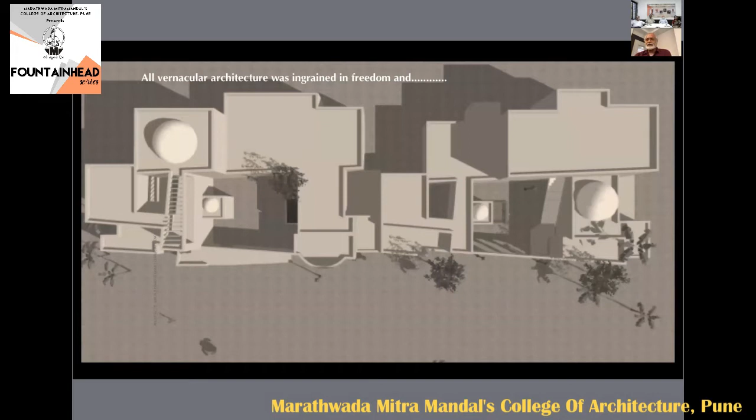Now, all vernacular architecture was ingrained in freedom. If you see the slides, you will find these are all works of our office, and I'm trying to explain what I'm saying through the images behind. All vernacular architecture was ingrained in freedom, and this freedom came with a sense of responsibility, and that sense of responsibility is missing these days.

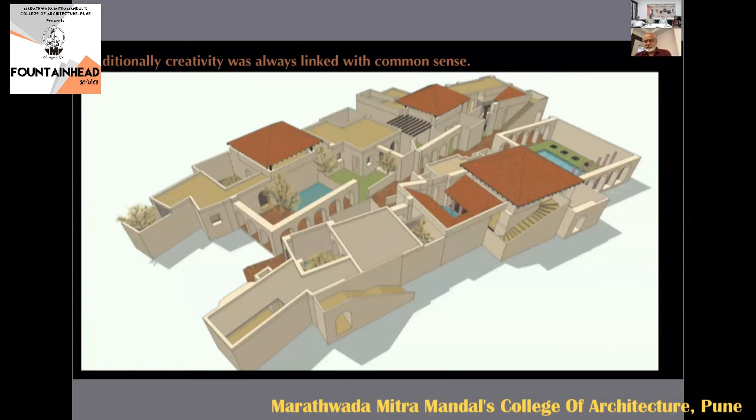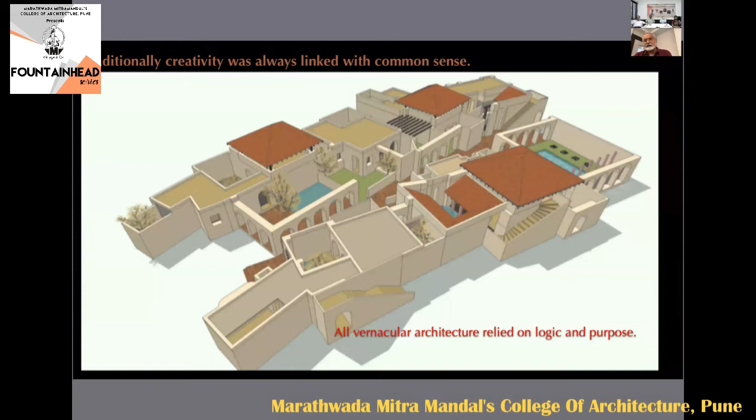Traditionally, creativity was always linked with common sense, and this vernacular architecture relied on logic and purpose. Today, we have lost the sense of logic in architecture.

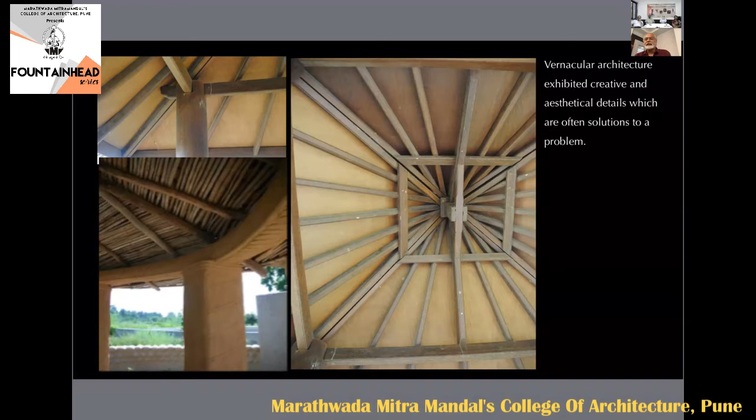Indian vernacular architecture respected growth in conjunction with continuity. Now, this conjunction with continuity is what we have lost. And it exhibited creative and aesthetical details, which are often solutions to a problem. These days, we are creating problems and then giving solutions. It's the other way around.

Architects need to pick up the threads that modernity severed. The need to reinvent a new and more responsive architecture, which will be a continuum of the vernacular. The need to reinvent - this is a very vitally important link in the whole process.

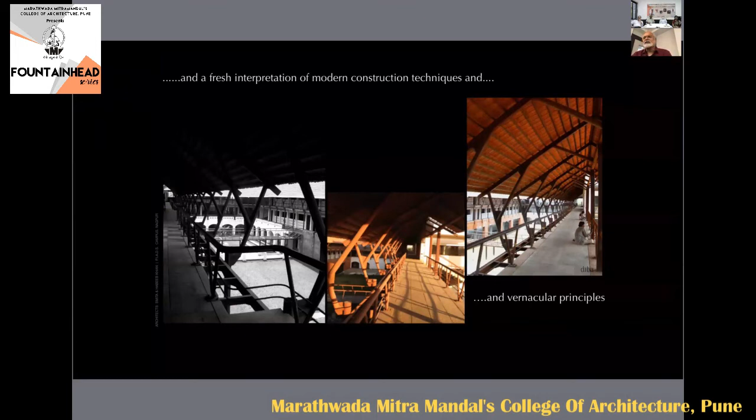The need to reinvent a new and more responsive architecture, which will be a continuum of the vernacular and be a response to climate, context, tradition, culture, and our lost construction techniques, importance of daylight, ramifications of heat, and appropriateness of built forms, resulting in a new architectural vocabulary, a language having its root in layers of traditional wisdom, and a fresh interpretation of modern construction techniques and vernacular principles and forms, and is a link between the past and the present.

I do not want any historian to assume that my buildings were built in the 1100s or 1500s. I want historians to believe that my building was built in 2000, 2020, 2021, because the concept of time frame in architecture is very vital.

It determines the evolution and the chain of evolution that I was talking about. And this we call contemporary vernacular.

Now, what is contemporary vernacular? The images you were seeing were from Priyadarshini Institute of Architecture and Design Studies that we designed, which relies heavily on the wisdom of our traditional architecture, uses modern materials, and uses a construction technique which is very age-old.

There are no RCC slabs here, and so on. It uses the wisdom - for example, if you see the wooden post when it went into an adobe wall or a mud wall, over a period of time it got decayed.

The same thing happens with the steel column - when it goes into brickwork, it starts rusting soon. So our vernacular builders used to leave a gap between the wall and the post where it went in, so that it lasted long.

The same principle has been used here. So this is what you learn - you do not need to reinvent the wheel again and again.

So what is contemporary vernacular? It's like going back to roots, building sensibly, building optimally, building intelligently, building correctly, within the framework of context, climate, tradition, geology, geography, and economy. So this is the actual thought process.

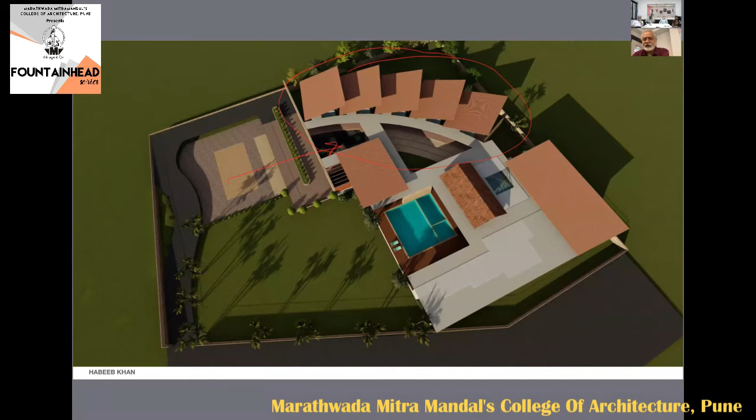You will see the idea behind it. Why does a person make a farmhouse? The farmhouse or a weekend home is something away from the city to de-stress himself. His expectation is that he should get a space to live in, wherein everything he gets is different than what he gets in a city. So that's the idea. Let me go to the next slide and we will see.

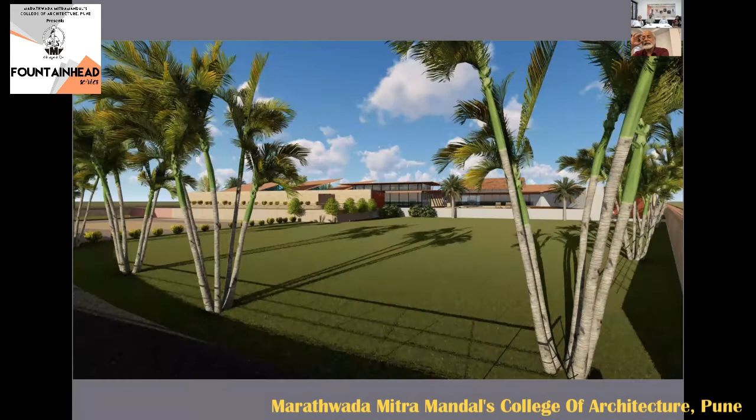That's the entrance to the house, and that's how you enter. You arrive, get dropped off, and that's the opening where you walk in. There are lily ponds and water bodies.

The concept is there are two planes: one is a horizontal plane, and the other is the roof plane. We are improvising here, where the Mangalore clay tiles, the terracotta tiles used on the roof, are having solar panels, so you don't need separate solar panels anymore. But the experiment is not yet successful. We're still in the experimental stage, where we'll be able to efficiently produce solar power and convert it into providing electricity and other power to the house.

The local sandstone, called Savner sandstone, has been used, and the wall masonries are actually load-bearing masonries. There is no RCC column or concrete structure here. The stone masonry takes the steel slab, which is a composite slab. I will explain how it is.

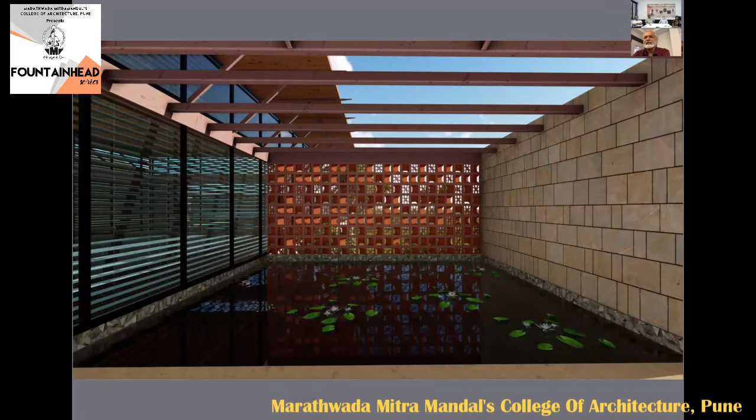Various spaces in the farmhouse. That's the bedroom from the outside, with large decks, overhangs, and taking in north light and so on. It's a composite structure of stone masonry, somewhere exposed brickwork, and steel.

There's the pool, and how you look into the drawing room, the formal drawing room which is for public and guests, while the other part is a private area. That's how you look into various insides, the spaces inside. That's the formal room I was talking about from the entrance.

Look at the structural system we're having. It's a steel structural system where the system is integrated with the facade, which is the glass facade. It's an integrated system wherein the structural system takes in the facade and the cantilever. If you're seeing, it's a 3.5 meter wide cantilever being supported by those triangular metal sheet brackets.

Same here as well, the diagonal structural system comes down from the foundation and goes up to the roof. And if you notice the structural system here, it's integrated with the columns coming in from the foundation. So a little improvisation here and there, and that's the inside courtyard.

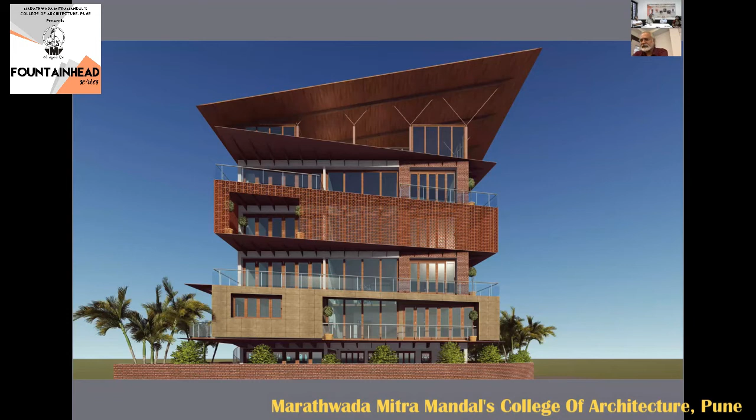This is basically to show you an example where there is a tight plot of land in an urban city where still you can break down and articulate the facades with a solar powered roof on top.

The openings in the stone cladded floor are basically because of the activity happening inside, and the brick jali, terracotta jali on top, is something to create privacy because of the residential floors on top.

These are some articulated views of the facade. And this is how it looks.

There's another house in a village about 50-60 kilometers away from Nagpur, where there are a lot of Maharashtrian vadas. What we have done is tried to create a contemporary expression of that vada with the same planning.

This is another house where we improvised upon this; it belongs to a Muslim family who wanted privacy for their living quarters. The ground floor has the public areas.

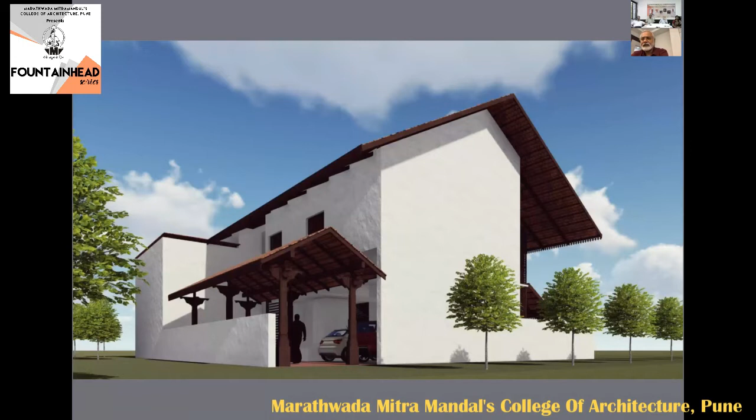This is another house in another community development that we're doing. This is made entirely of adobe construction, unburnt bricks and adobe plaster, and wood, recycled wood, that is.

I'll just skip this. And this is an interesting house; you will find it doesn't fit into our style or vocabulary. But we're doing a development where there is a very strong colonial presence.

I'm sure you would know Lutyens' houses, residential houses in New Delhi, Lutyens' Delhi, whatever you call it. A similar settlement is in this town where we're developing this.

So we've tried to use that, and incidentally, the columns that you see have been recovered from a house which was demolished. So that vocabulary has been used there.

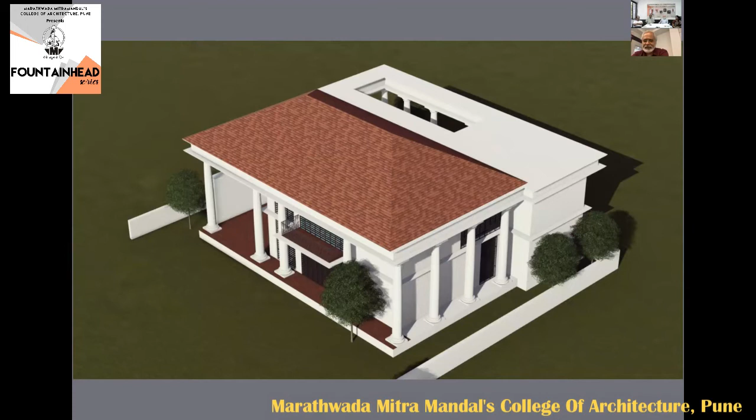Basically, being contextual does not mean that you will build in mud or use tiles or use stone or something. Context, you have to identify what the context is, and that context is to be used in your projects.

Now, there's a house that we did in Indore. It's completed now, but I think I don't have the finished photographs.

The presence of the water body was overwhelming inside, and we didn't want any built mass there. So the grouping of the whole thing has been done in such a manner that it is absolutely transparent wherever the lake is visible. This side is the lake side, and all this is transparent, visually transparent, eyesights all over. The area which does not look into the lake is all service areas and other areas where transparency was not possible. And the swimming pool sits like an infinity pool at the corner where the lake comes closest to the building.

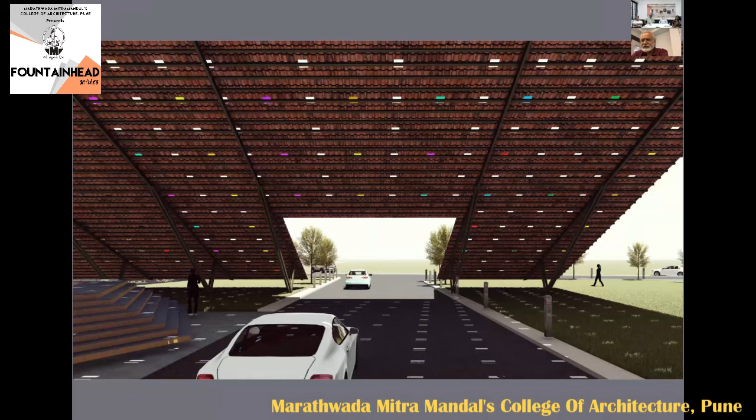That's the entrance to the porch. Once you're inside, the entire porch is lit with multicolored glass, multicolored terracotta tiles having glass inside. This will also have...

Solar-powered Mangalore tiles. At night, when you drive down from the entrance, the landscape, designed by a Hyderabad architect, is dynamic - as your car or bike drives in, it triggers a displayed landscape as well as dynamic lighting systems. The movement of the car actually governs the lighting that happens in the porch as well as in the landscape. That's how you exit the porch and look at the pattern the sun creates on the walls throughout the day, and the LED lights we create at night.

There's the entrance walkway. You walk into an open lobby with nothing built except a huge roof. Then you sit there, chat, and there's a reception counter. Incidentally, the columns used are also recycled and resourced from a building quarry close by. That's how the passage is, and you can see the lake behind.

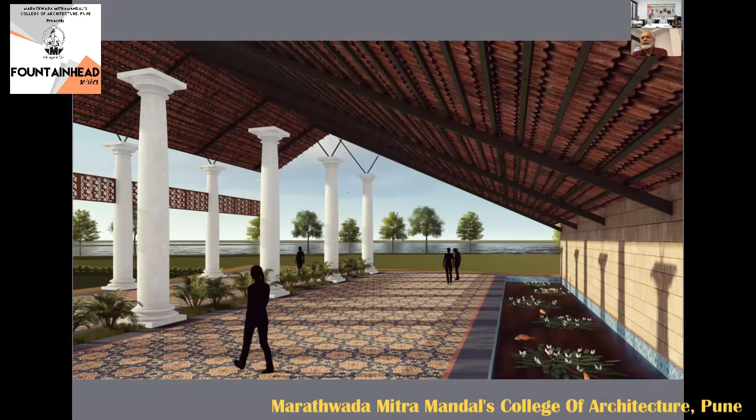You walk into the restaurants on the left hand side. On the right hand side is a huge, about 2 acres of sitting area for open dining and a coffee shop. That's the open area, sit out. The swimming pool, the services of the pool, the changing rooms around the pool, the restaurant facing the lake and the pool.

I just try to understand the vocabulary and the structural system, and the architectural connotation that it has on the built form.

Now, this is an office we're doing in Delhi for a student organization. Exposed brickwork, northern side is the facade with the sun roof with solar panels, and how it looks at night. This was thought to be a very progressive and non-Indian looking building, so we were asked to revise the designs. This is a place where students from across the country come and learn and study and live. So we tried to borrow motifs from across the states, 35 plus states, and convert them into various panels of GRC, wherein the building assumes this shape.

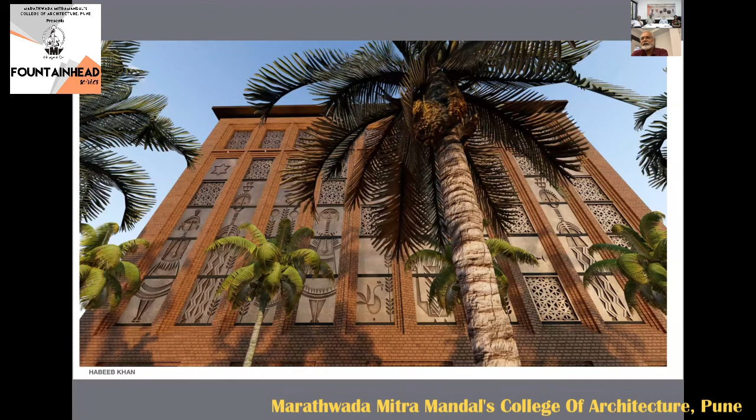The work has started. And there's another political party's headquarters in Rajkot.

The building is made an effort to be transparent, to interact with the street outside, with people outside, and vice versa. People walking on the street should also visually interact with what is happening inside the building. You have a dramatic entrance to the first floor of the building, and on the other side, you have screens to shield when the sun comes in.

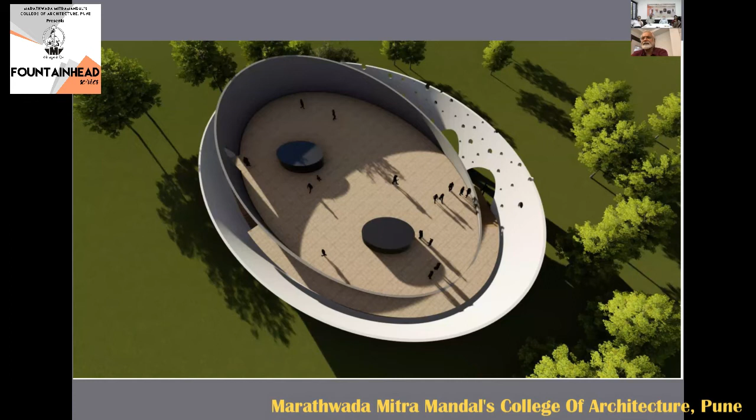There's a small museum for two saints that we're doing in Nanded. This is just the circulation of that museum, which is important, wherein you climb through a ramp or a staircase and go up, pay your obeisance to the saints, and come down to the hall on the ground floor through those ramps, seeing and understanding the life and teachings of the saints.

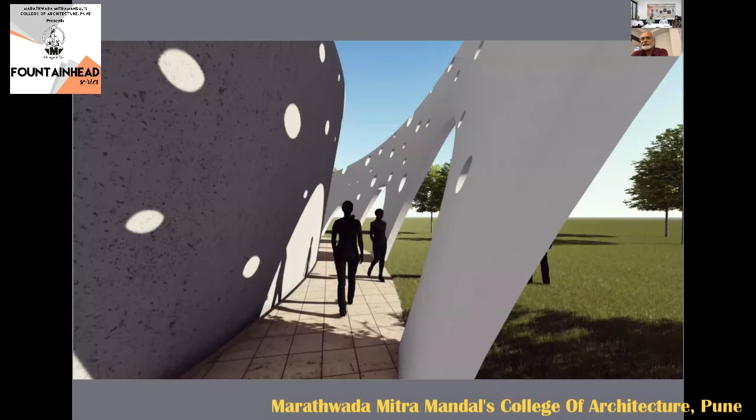This is a museum that we're doing for Father of the Nation in Sevagram, outside the famous Sevagram ashram. It's in proposal stage at the moment, it's gone for approval.

The humbleness of the person and the personality and the thought process compelled us to take the museum below the ground. We already had a slope of more than 3 meters on the site, and we utilized that slope by digging and filling, making the building absolutely underground.

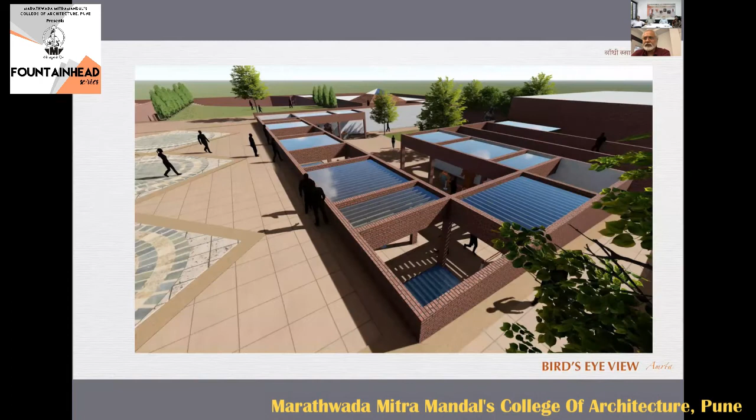So this is what you see when you arrive into the museum. You take a ramp down, and it's made up of brick and exposed brickwork totally. Somewhere to give relief, there's a plastered wall. Various courtyards, interactive spaces, patterns, and even when you're on top, if there's a roof or a covered area, that is also transparent. You can see what is happening inside by standing on the arrival level. So it's not that there's a slab or a solid surface and you cannot look down.

So this is how various courtyards and everything, interactive spaces, are arranged.

This is absolutely on the drawing board, as we have given a proposal and we are awaiting approval from the government. Then it will go on to the detailing stage.

Now, this is a Freedom Fighter Smarak and museum in Chhattisgarh. This also derives from the fact that the freedom fighters from Chhattisgarh, basically tribals, were unrecognized and not acknowledged, and very humble and docile people. But their contribution in the freedom struggle was immense.

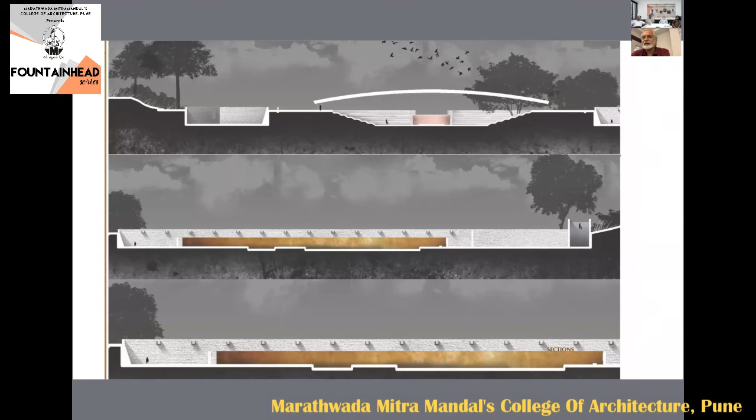These are various sections which I won't have time to discuss, I'll just show you. This is how it looks. You just have a white dome when you see from top, and everything else is grass and landscape areas.

And then you go down into the memorial and the museum.

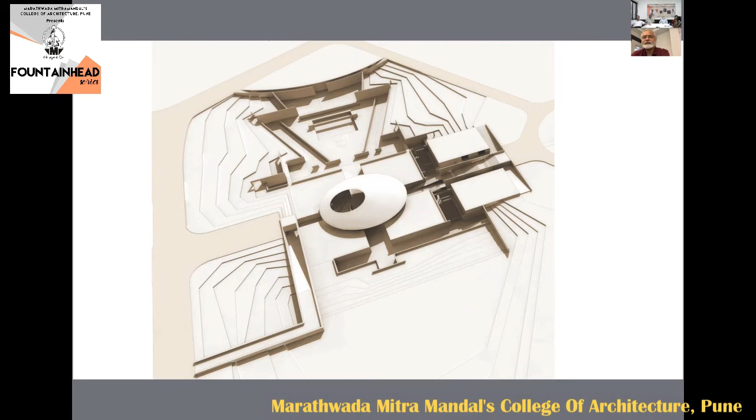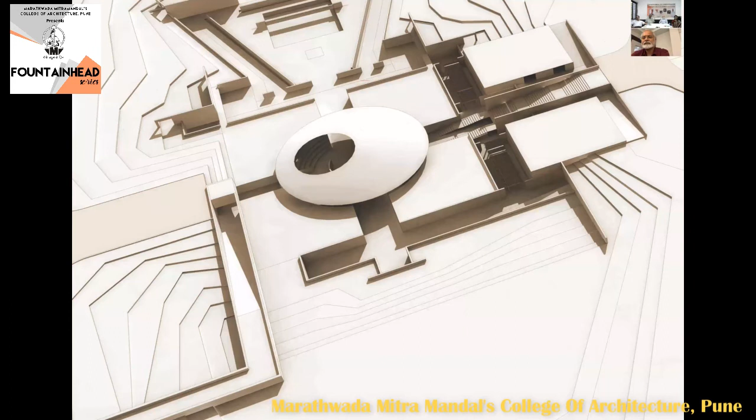The file is heavy, I think. This one... it's getting stuck. I'm sorry, there's a break here.

So this is how the museum is. On the left-hand side is the memorial. On the right-hand side, with that circular dome with an opening in between, is a courtyard which is covered temporarily with a temporary fabric-like structure, and the museum is inside, in the ground.

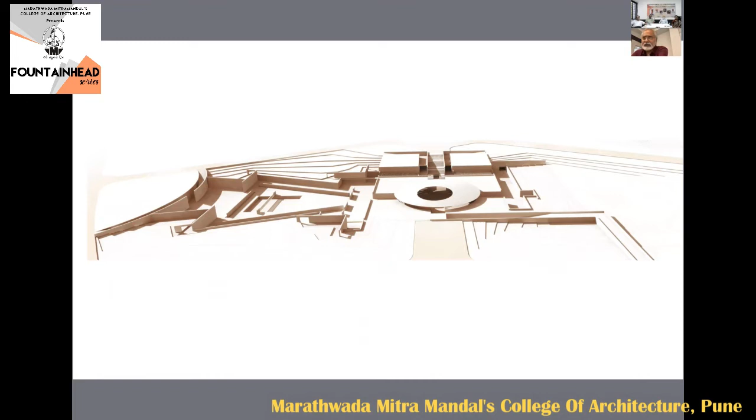There's a natural slope of the site coming from the back to the front, and that's what we utilized for the memorial and the museum. This is how it looks.

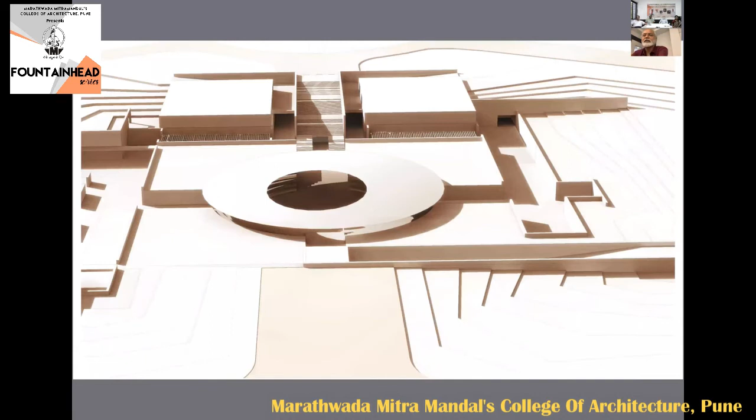That's the central courtyard of the 4 blocks of the museum, where you walk down into the central courtyard, and on the 2 perpendicular axes are your exit, and on the left-hand side is the memorial, where you have walls inscribed with the names. That's the entrance to the museum, where you walk into the ground and come to the museum.

Now, this is a pottery research center. You can ask me to stop whenever your time is up, I can stop anytime and explain.

So this is a pottery research and development center in Maharashtra, where there are existing facilities. They used to make pottery, and they still make some pottery and do research in terracotta material, building product, and material development.

There were 2 chimneys existing on site, which you can see, and we have retained that visual, potent symbol of those chimneys from days gone by, and tried to club the buildings around the chimneys.

So the open areas are needed to dry the terracotta and ceramic products. That is what it is, and the kilns have now been modernized and taken in.

On the left-hand side is the white roof that you see in the administrative block, laboratories, research center, and storage units. On the right-hand side, you will see hostels, staff quarters, and conference facilities.

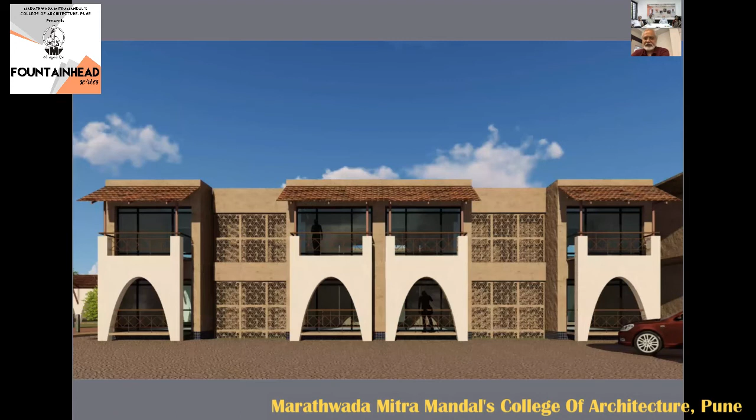These are the hostel blocks, ground plus one, the staff quarters, and the play area around the staff quarters, which is in phase 2. This is how it looks, and that's the conference facilities and so on.

Now we're doing some wayside amenities for the NHAI, and there are a couple of proposals. This one is being made outside Nagpur. It's an interesting form where there's a shortage of land on both sides, the left-hand side and right-hand side of the highway, so we give only parking and toilet amenities there. The entire food court and other activities are lifted above the ground, 6 meters up, connected by lifts and staircases.

This entire block is a solar power generating block, with advanced solar panels that produce enough electricity not only to power itself but also to supply power to nearby villages. So this is how it is.

I'll just skip through—it's a structural tube and also solar generating. We're also experimenting with road panels; when cars drive over them, they also produce electricity. It's not a great success at the moment, but we are still trying to find agencies and vendors to do that.

Now, as the highway travels across states, the vocabulary keeps changing. So when it travels in or around Jaipur, we try to make it contextual, using Dholpur sandstone, Jaisalmer stone, and other locally available Khatu stones, borrowing vocabulary from local, potent architectural symbols.

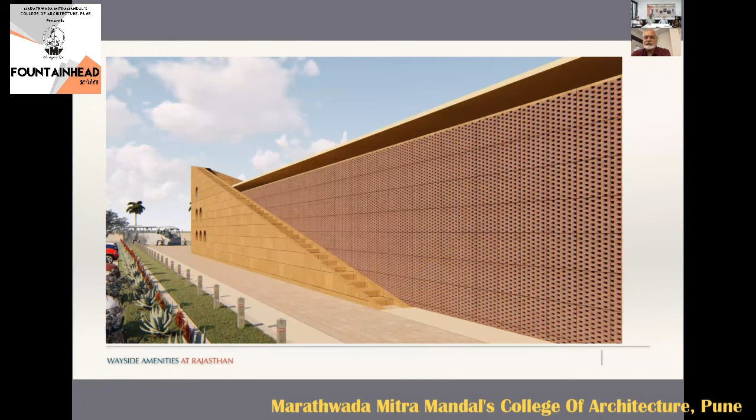The detail—one of the details—the jali, the stone jali, and so on. This is how it looks, the LHS and RHS, about 15 acres on the left-hand side and 15 acres on the right-hand side. Some activities are connected by an underpass, and some activities don't repeat.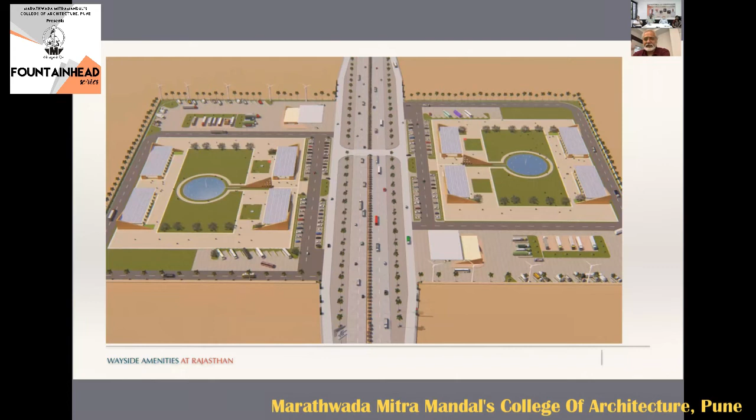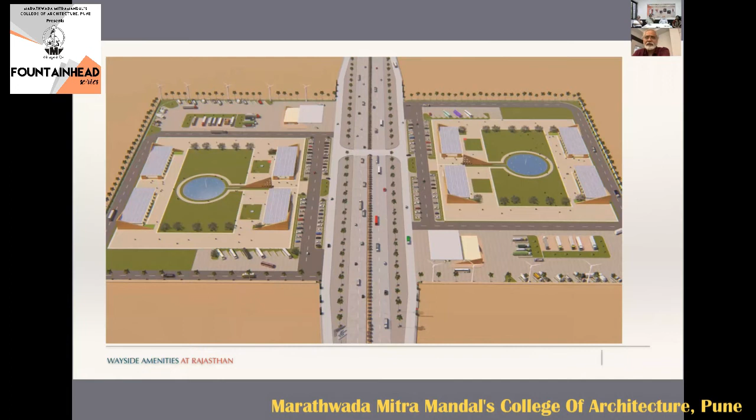Activities like a trauma center with a few ICU beds and other medical facilities, a huge food court, a motel, a shopping area for local produce, a dhaba, a dormitory for truck drivers, a fuel station, and so on. So some activities repeat, some don't. This is how it is.

When you reach Jodhpur and cross it, exiting towards Gujarat, the vocabulary changes but the material remains the same—the construction technique stays the same in stone, and all this is being built. So this is how it is.

The details of the food court from the outside, with the same concept of recycled water, but in the form of a square cone and so on. And this is it—we're doing this across the country.

It changes when it starts from Srinagar—the vocabulary changes—and when it comes to Gujarat and further south, again the vocabulary changes. Now these are the Parli Vaijnath Temple in Beed. We're doing some work there, but the project is on hold at the moment.

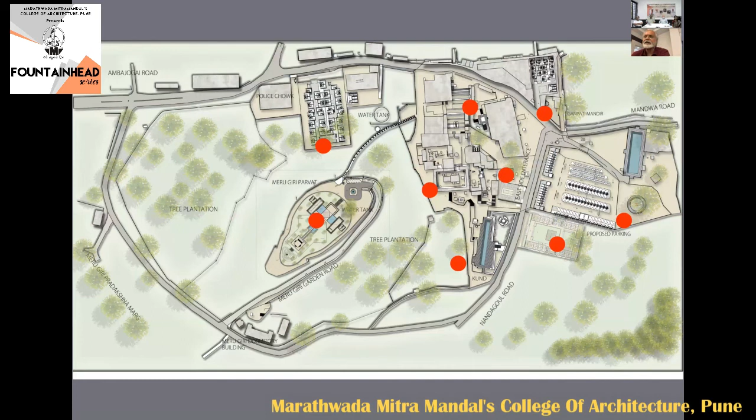So I'll just go through these possible interventions quickly. This is the entire temple complex and the surrounding precincts where the intervention is happening. There's local black stone, basalt stone, and the Harihar Kund, which is currently a dump yard, so we propose it to be renovated.

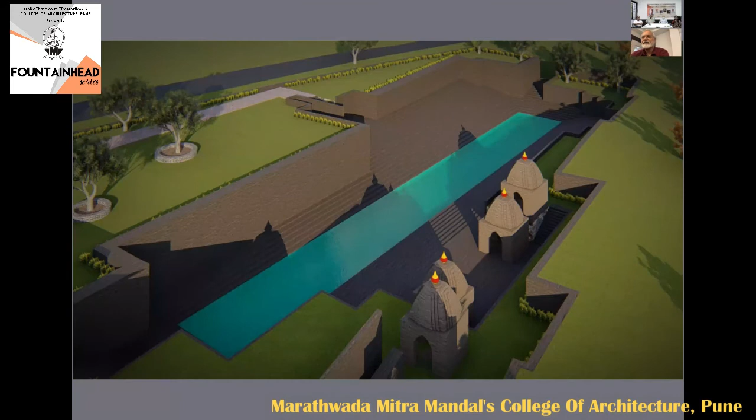I'll just skip this because we're doing a very huge, large convention and exhibition center in Nagpur for the Agro Vision exhibition and agricultural university. This is how it is, and we were short of land.

They needed experimental fields for horticulture as well as agriculture, and also needed large parking spaces, laboratories, a research center, and staying arrangements like a guest house. So we devised a method where we made a roof, and the horticulture happens over the roof of the exhibition halls—weighing this against the land value of buying another nearby plot, versus using the roof area, which was enough.

These three halls are about 1.5 lakh square feet. It gives enough area to do horticulture experiments. It's a flowing roof, and that's how it looks. And the entrance, and you arrive.

There are 3 exhibition halls. The central exhibition hall has a food court, a convention center, conference facilities, audiovisual facilities, and all that. There's a gap, an open space between the 2 exhibition halls, which is an interactive space for the exhibitors as well as visitors and guests. That's how it looks.

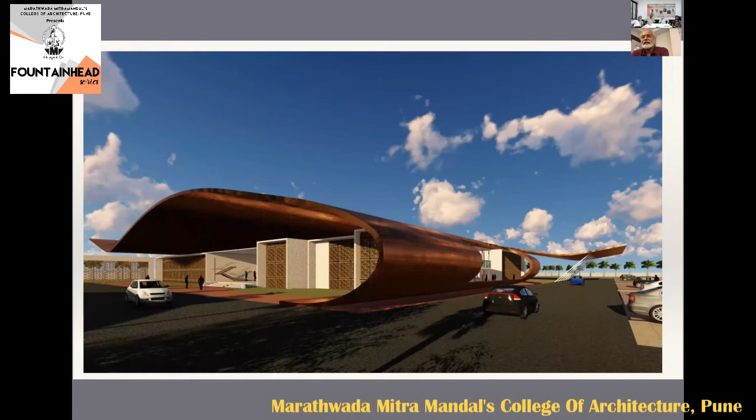The admin block, the research block, and that's it. These are some projects which are finishing and getting completed.

The large apartment scheme in Rajkot in Gujarat. The entrance lobby. This is how it looks.

This is a completed house in Nagpur, using sandstone columns, Mangalore tiles, and wooden roofs recycled from broken old houses.

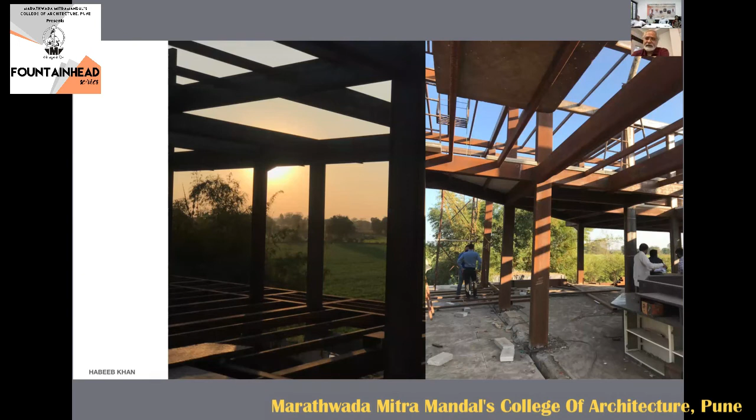A few completed houses. A house under construction, where I explained the detail of steel, but we're running out of time, so we'll just let it be - how steel is used and how the structural system is used in steel.

There's a pub which is just being completed. I'll just skip this. Another house detail. The other building which is getting completed.

This is an extension of Mungsaji Maharaj temple precincts, where they have dining halls, residential guest houses, and shopping areas to sustain the maintenance of the temple. Dining areas, dormitories, another office completed.

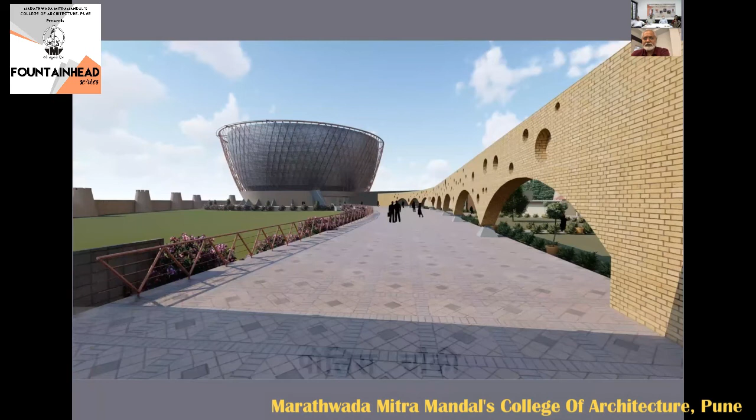This is a large museum for the Banjara community that we're doing in a place near Washim called Pohradevi, which is their holiest place, the Sant Sevalal Maharaj temple premises, where we are making the country's largest museum. It's an inverted dome made in steel, and the entire building is solar panels - about 80,000 square feet of solar panels, making it self-sufficient.

These are the solar panels I was talking about, currently in construction stage.

This is Priyadarshini Institute of Architecture College, where I am the director. This is JD College again, the academic block facade. I won't explain in detail because I have another meeting at 5:30, so I'll have to wind it up in 10-15 minutes.

I look at the wisdom of the ancient builders, where the heavy stone masonry was on the ground floor, brick on the first floor, and nothing on top - the entire wall itself becomes an opening in wood and so on.